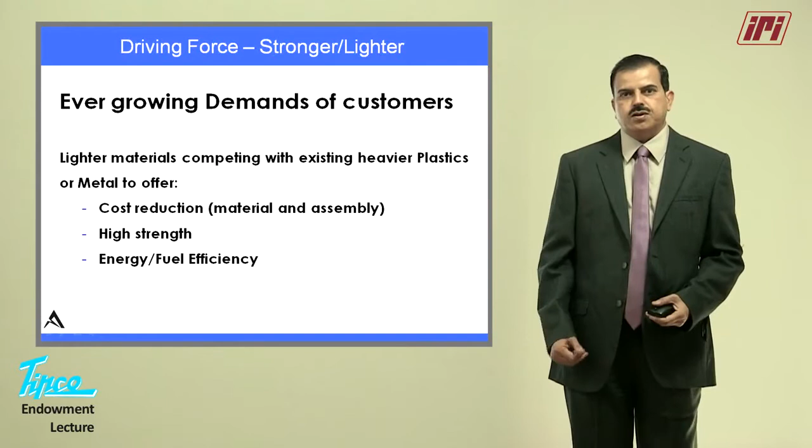This product we are marketing in the name of one of our group companies called Autotech Polymers. Basically high strength materials with the aim of reducing the weight of components. There is a continuous demand from customers that there should be lightweight which helps them in reducing the cost of materials. It can be achieved by higher strength because nobody wants to sacrifice any kind of properties, whether it is flexural or impact. And if it gives energy efficiency, that is a bonus. All these three things come true for a new technology material called long glass fiber.

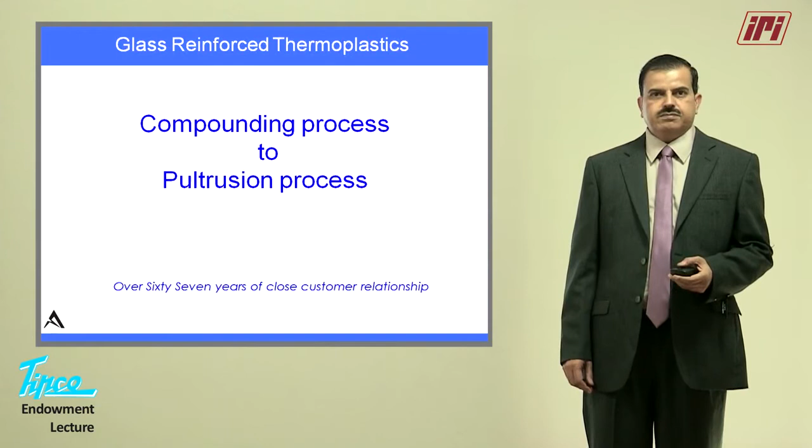Basically, while making long glass fiber, we have seen that we have moved from compounding process to pultrusion process. TIPCO had long experience of pultrusion due to another product which we developed in India, called jute phenolic. That first happened around 10 years back, to replace wood. That technology and experience helped us understand the pultrusion process being adopted abroad for making this kind of product. So long glass fiber for TIPCO is basically not a very new technology. We were using pultrusion process for quite some time.

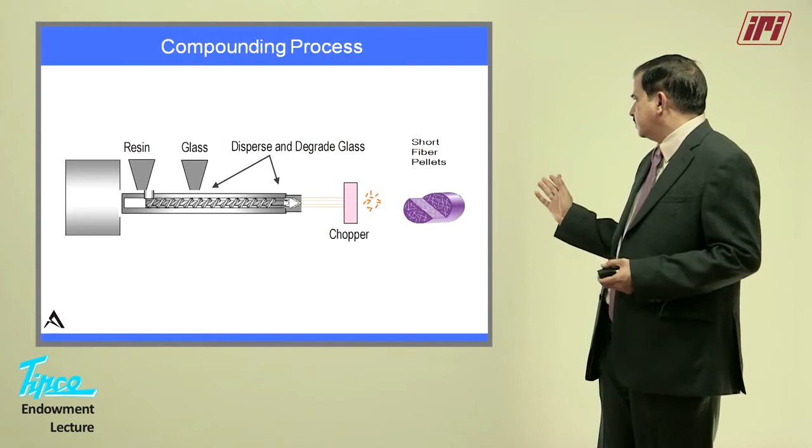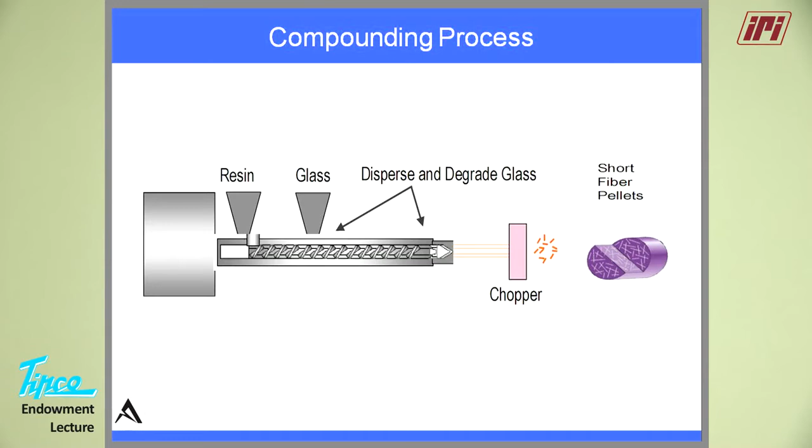I'll just explain to you what is the difference between compounding. The resin and glass are fed in the extruder, and then with the help of different kneaders it is compounded or mixed, and then taken into a water bath, cooled, and then cut. The last granule, in the case of short glass fibers, even in a 3 mm granule, you have so many broken glasses in the granule itself. Then of course it goes for the molding process, so further breakage happens, and that's why you get those properties. People have tried to maximize these properties, but there is a limitation in this process, it doesn't go beyond 0.6 to 1.1 mm in the product.

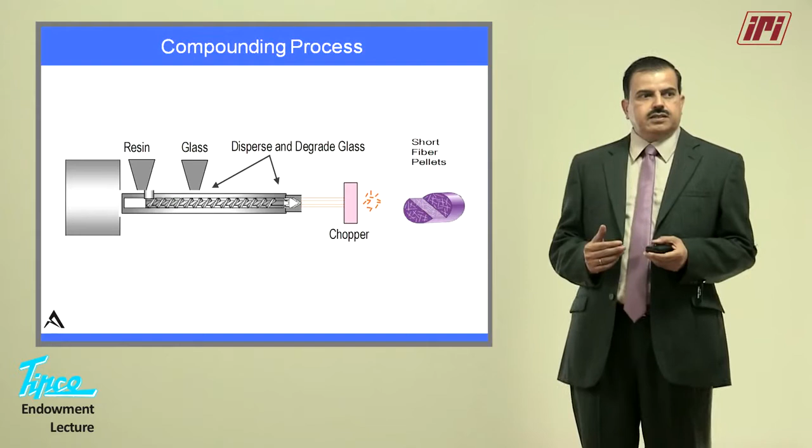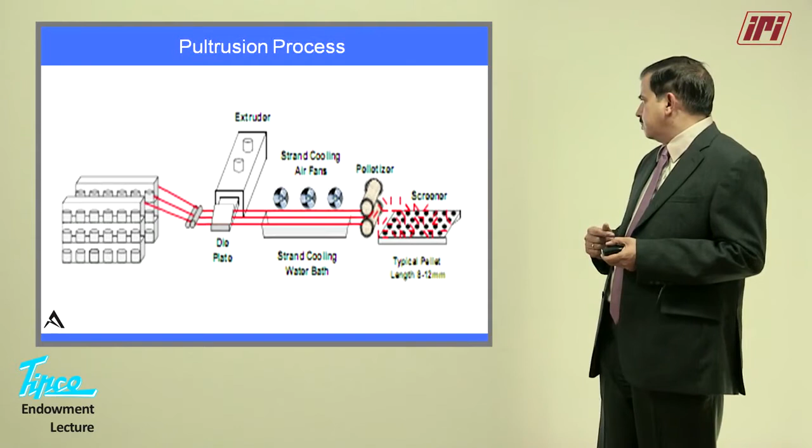So the alternative process was thought of, probably around 1995 or so in the US, and another product called long glass fiber took birth at that time. This is called the pultrusion process, where instead of glass chopped strands, we use rovings as a bobbin. It comes, passes through a die which is fed, resin is fed across, and in the die it is ensured that total impregnation, or 100% wetting of each fiber with PP or PA, whatever resin you are using, takes place. Then the process is similar, taken into a water bath and cut into a desired size.

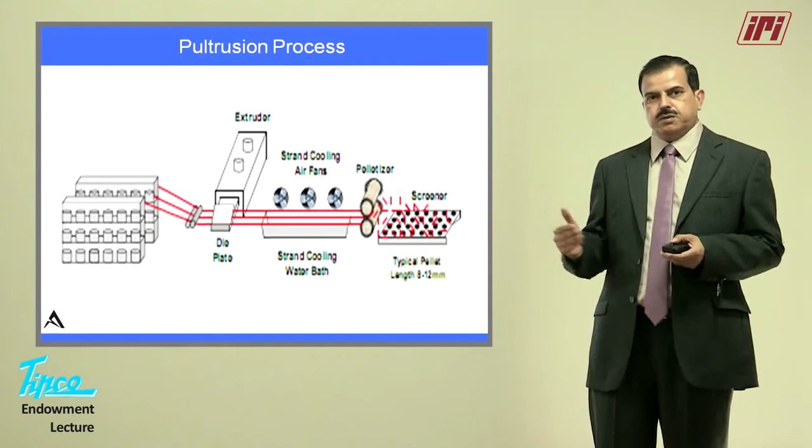When I say the desired size, it is 11 mm plus minus 2 mm. That is the size which has been found most suitable for being usable in the available machineries. When I say machinery, I mean further processes of injection molding, the tools which are being used these days. So the most suitable length for long fiber is 11 mm.

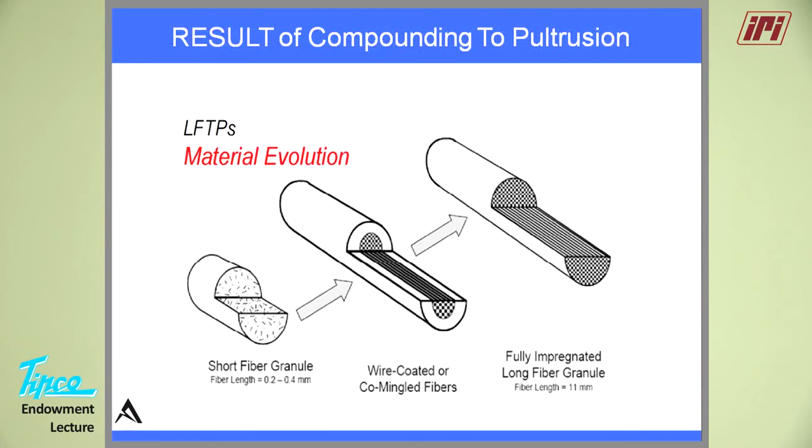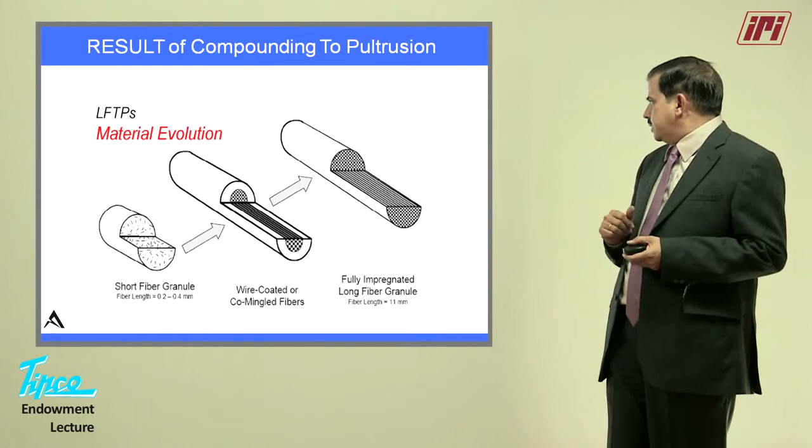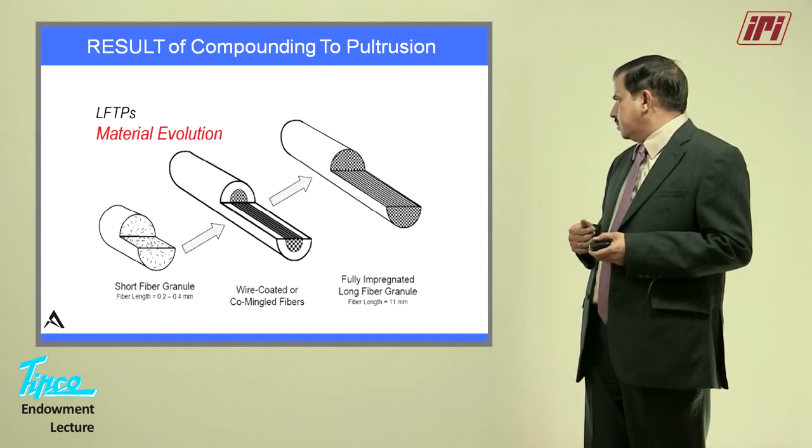The result of moving from compounding to pultrusion, you can see that there is one more step in between which happened. At present I am talking about going from small short fiber granule to a long fiber granule of 11 mm, but in between there was a time when the long fibers were being made by a process called wire coated technology. That wire coating technology gives you a coating of resins on the fibers, and the result is this: if you cut open the granules, you see dry fibers.

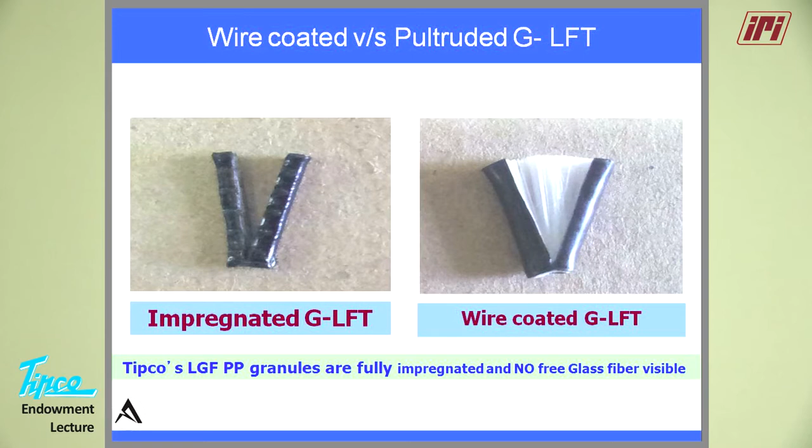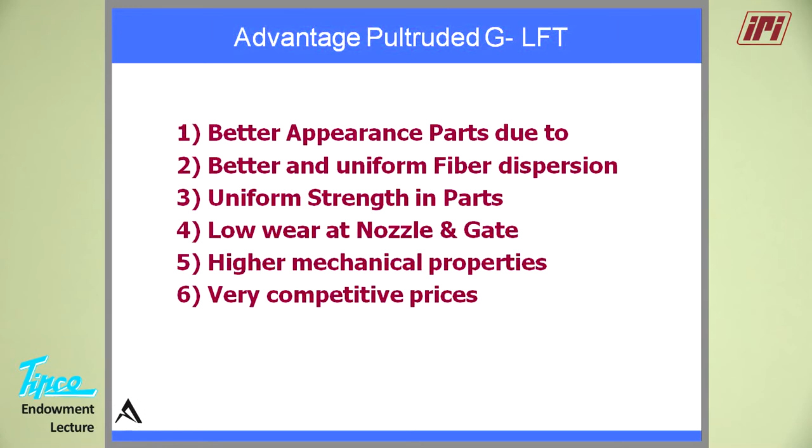Whereas in the latest technology, pultrusion technology, there is no dry fiber seen. The advantage of this is that it gives much better appearance, and I feel the biggest advantage it has given is that it is processable, or process friendly with the existing machines and existing tools. You don't need to make many changes in the process machineries, which is a cost.

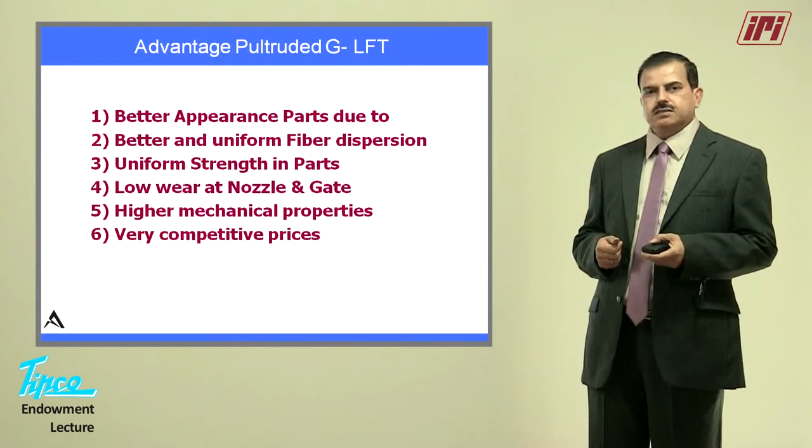When the wire coated technology was there, there was a need of making a special machine for using long fiber, and special tools to handle long fiber, so that you can exploit the length of the fibers in the final component.

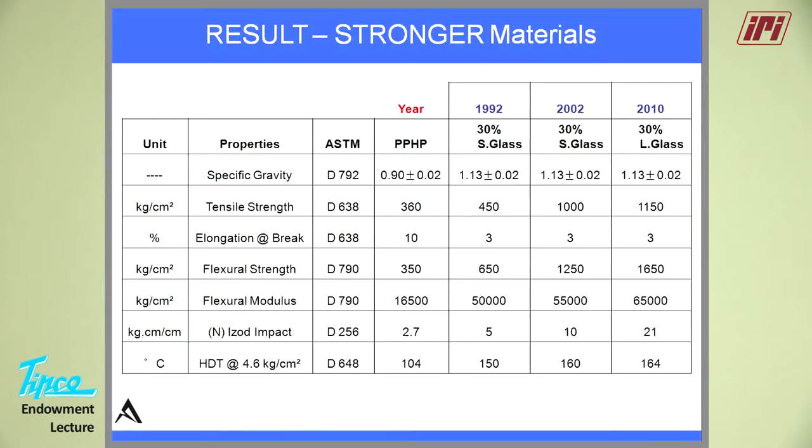This is the history of the properties. Especially keep your eyes on impact strength. I will say that in 1992, glass fiber PP 30% was having 5 impact. In 2002 it was improved to 10, and in 2010 it has become 21. So a long way, approximately 4 times the impact strength you get in today's long glass fiber PP compounds versus 20 years back short glass fiber PP compound with the same loading of glass.

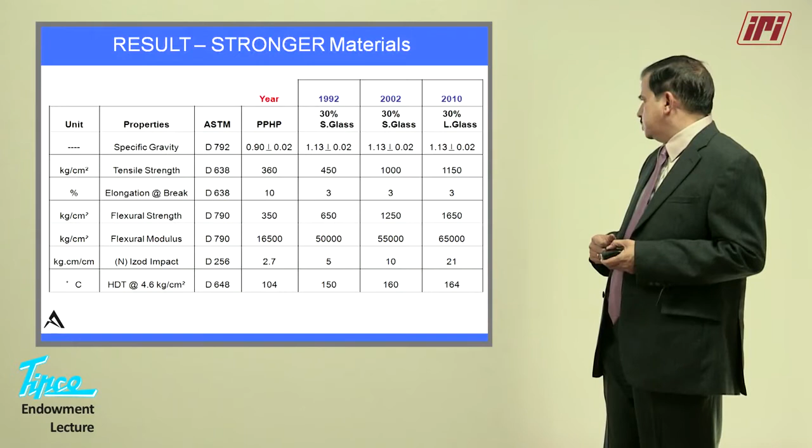As you can see, tensile also has improved almost 2.5 times, and flexural also has improved by almost 30%. So these are the advantages: you have achieved the impact strength much higher, tensile strength has improved, and flexural has also improved a little bit.

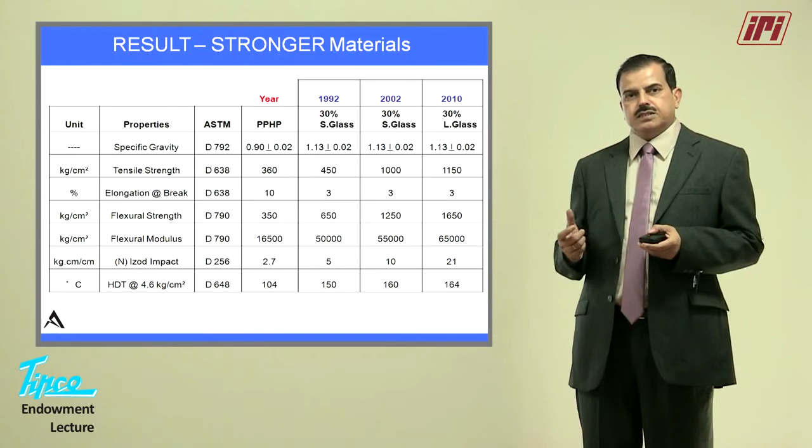The biggest advantage of this you will see in the next slides, that this helps design engineers to make thinner parts. This makes design engineers select commodity plastic compound pultruded with glass, that is long glass fibers, in place of highly costing materials like 30% nylon 6 or nylon 66.

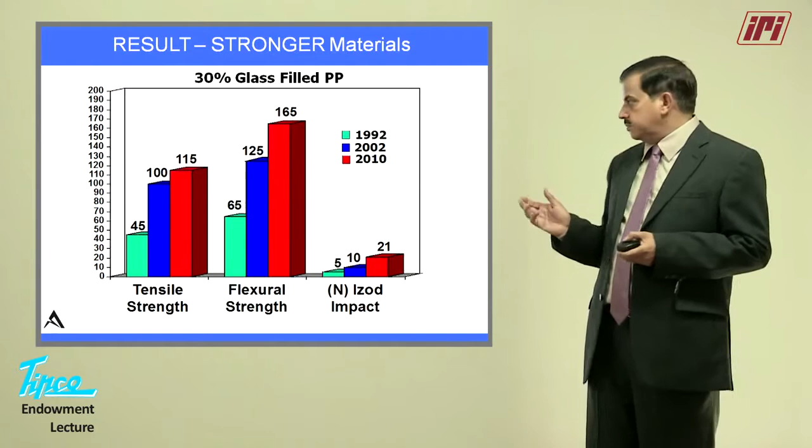This is a graphical presentation of three important properties which have improved over these 20 years. I would like to spend some time on this slide. This is one of the best ways to find out whether your component is made up of long glass fiber or short glass fiber. This also gives an idea why the impact strength has become so high while using long glass fiber.

Basically, if you make a component with short glass fiber and the same with long glass fiber, take out both components from the mold and put these two components in a furnace at around 650 degrees centigrade, you will see a big difference. A short glass fiber filled PP compound or PA compound, the polymer will burn off at 650 degrees centigrade in half an hour if you keep it, and all the glass fibers you will find flat on the surface.

Whereas in long glass fiber, what happens? You can see that whatever shape you have kept in the furnace, that shape is retained even after all the polymer has gone, all the binding strength of the polymer has gone, but still you can see a structure, you can see the holes, you can see exactly how it would have been, although because the resin has gone, the fiber gets slightly expanded, so the holes become smaller than they actually were.

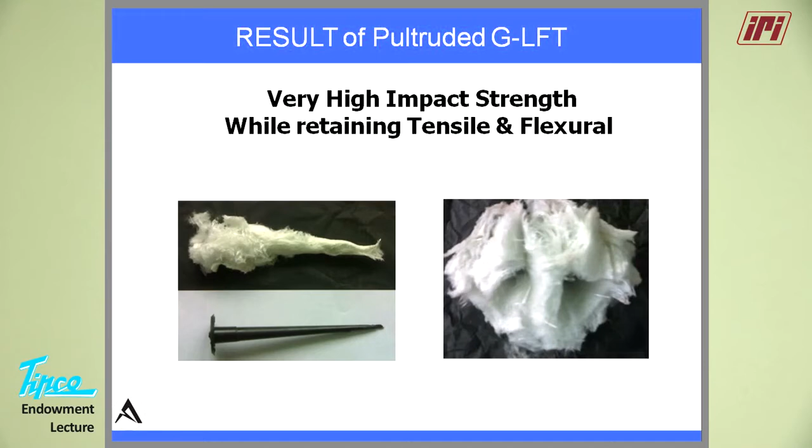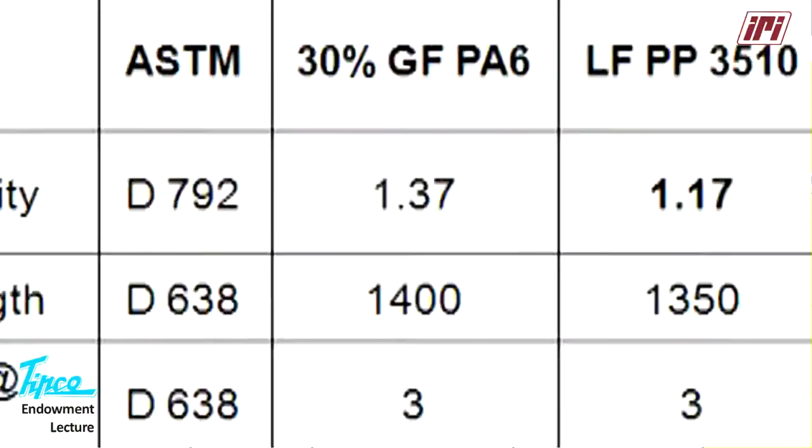By doing this, you are using a very efficient process of injection molding, and you are trying to reach towards the properties of FRP. You can see some comparisons I have shown here, that a 30% glass filled nylon 6 can be replaced with 35% long glass fiber PP compound, and this gives enormous benefits of approximately 17% reduction in the weight of the part, almost double the impact strength of 30% glass filled nylon 6, and very similar properties of flexural strength, so you don't have to change the thicknesses.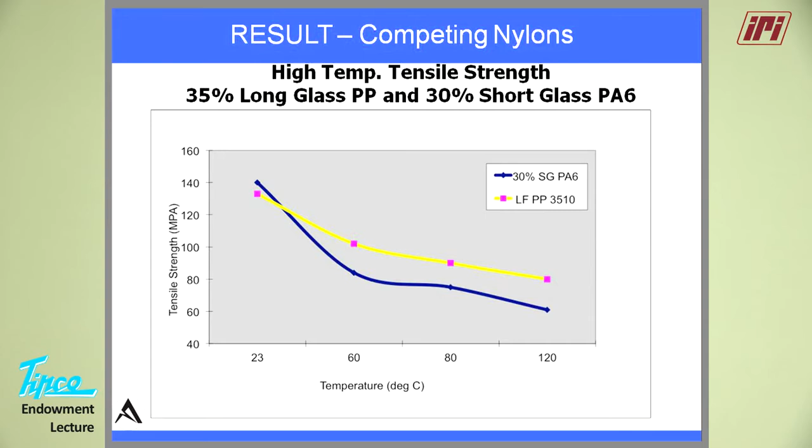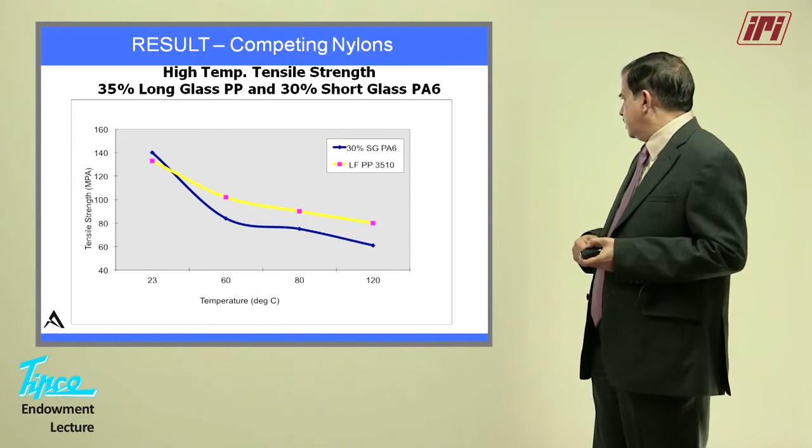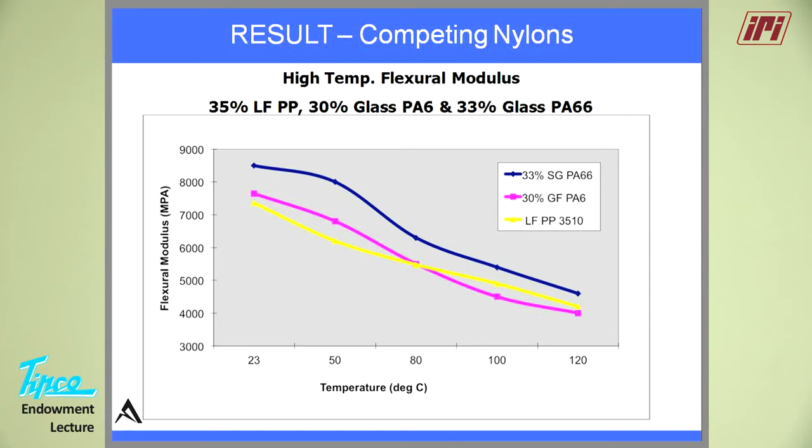But as you can see, the yellow line, up to 120 degrees centigrade, the drop of tensile property of long glass fiber is lesser as compared to 30% nylon 6. So if you test the tensile strength at 120 degrees centigrade, long glass fiber PP gives a better property than nylon 6 30% glass filled. Similar is the story with the flexural properties. It lies somewhere in between nylon 6 and nylon 66 up to 120 degrees centigrade. So in most of the underhood applications, 35% long fiber PP can be used as a replacement to nylons.

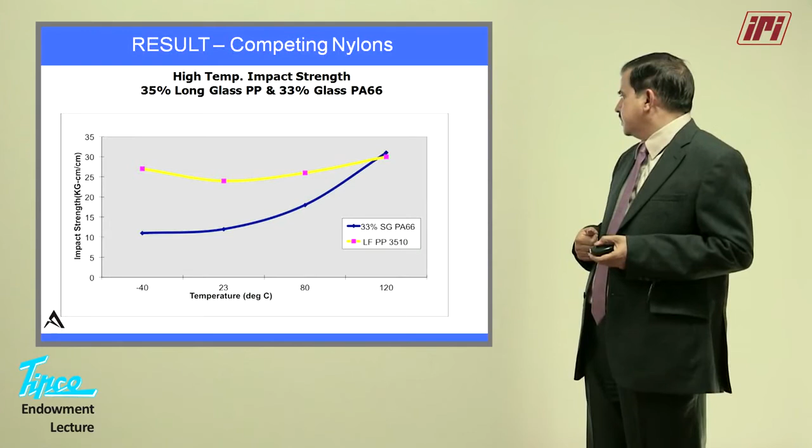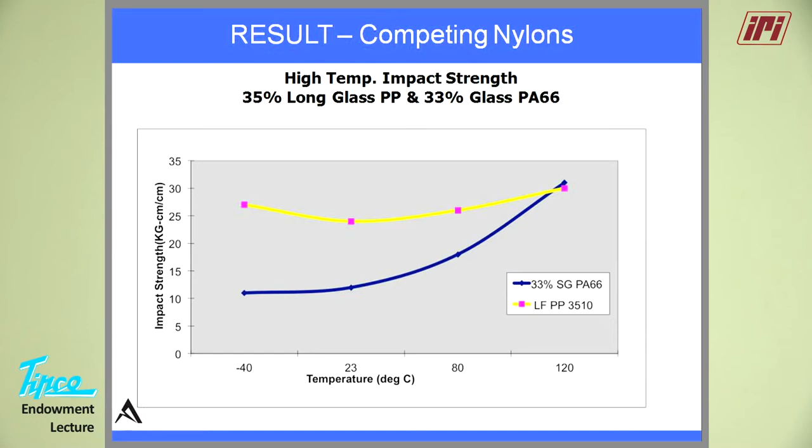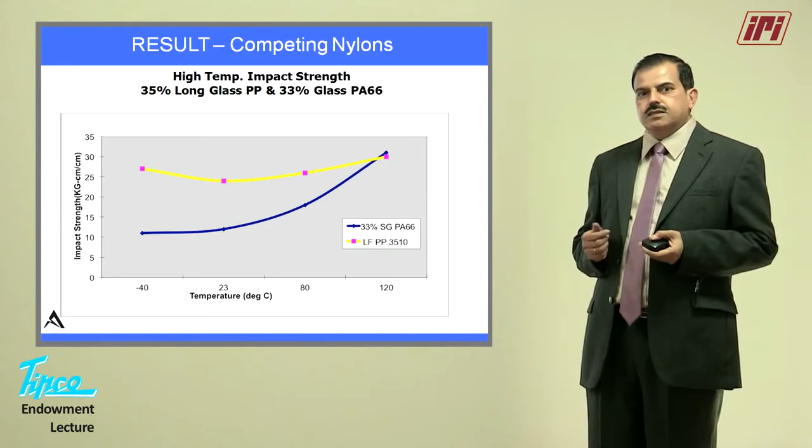This is a very surprising and good thing about long glass fiber, that impact strength, as I told you, is quite high because of the structure it retains even after burning the polymer. That is the reason why at sub-zero temperatures, the impact strength further improves. It doesn't go down. So that is something very unusual with plastics, because at minus temperatures, generally plastics tend to become more brittle. This is opposite.

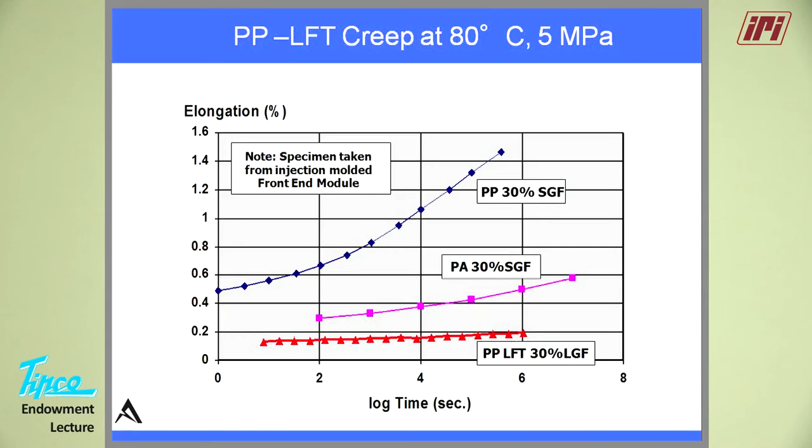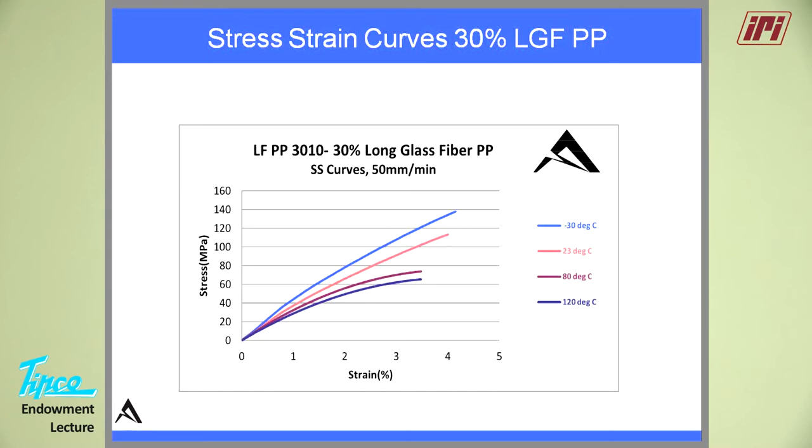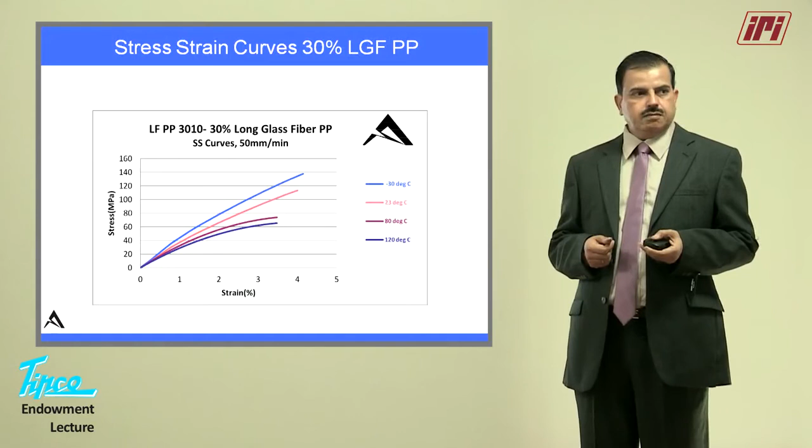There are some more advantages of long fiber. That is, the creep value is the minimum as compared to short glass nylons. That's the biggest advantage. All the properties for long glass fibers are available with TIPCO Industries. It is also available in Moldflow software, and those properties can be used by the design engineers while selecting our material.

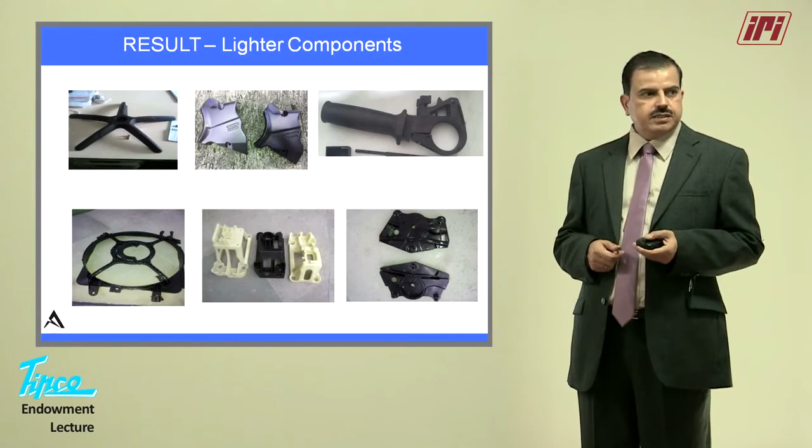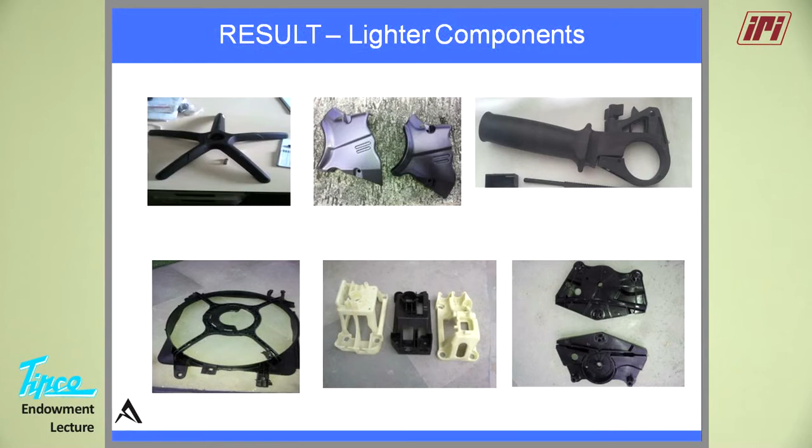These are some of the examples where we have worked in India, and in many places it has been successfully commercially implemented. Some of the applications you can see, like chair base, which used to be in nylon 6 30% glass filled, the chain cover for two-wheelers, the tool holder for power tools. The next one is the shroud. Next is the gear shifter base, and there are some control modules. This particular one is the window module for one of the OEMs in India.

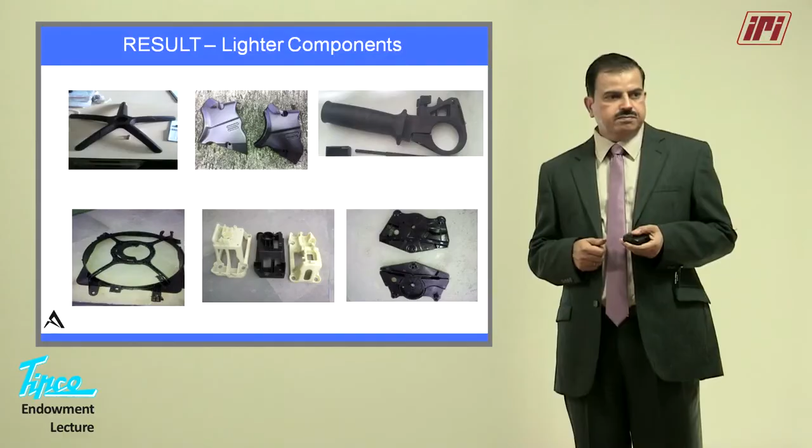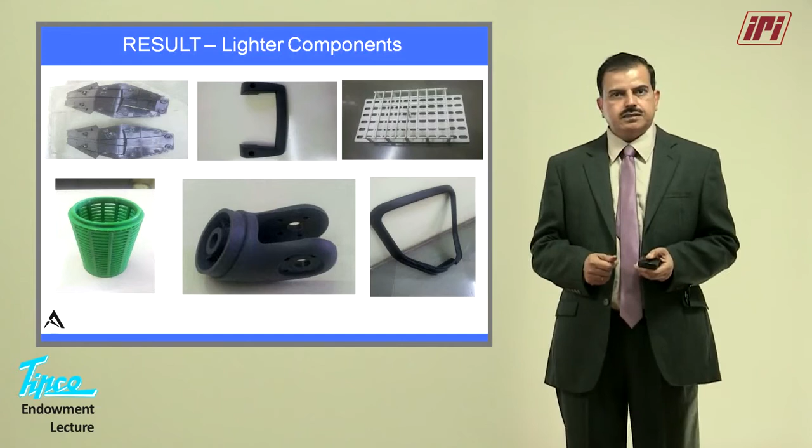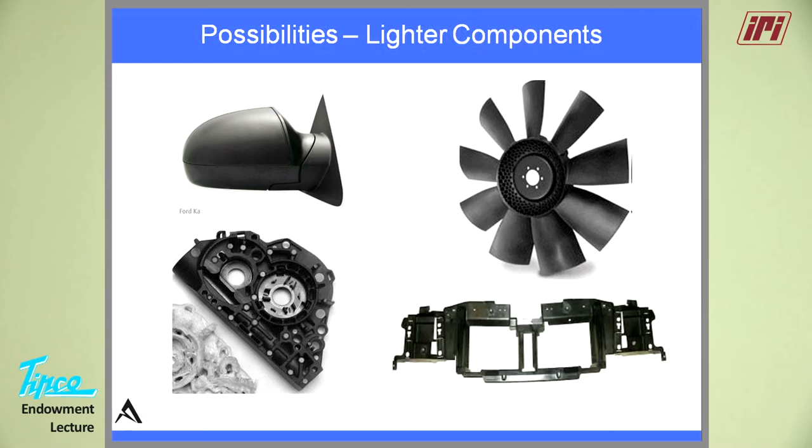Next, you can see some of the other automotive and non-automotive applications where nylons or PC ABS or ABS parts were replaced by different percentage loaded PP long glass fibers. These are some of the possibilities which we see in India, that some big components in the automotive industry which are presently in nylons will get replaced by long glass fiber. The component down in the corner is called the front end module, which in one particular model in India has already come in plastics, and soon there will be many OEMs looking for this kind of opportunity of weight reduction.

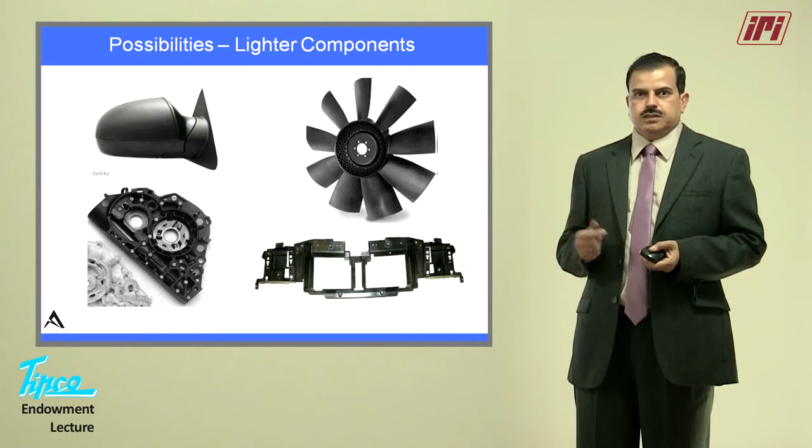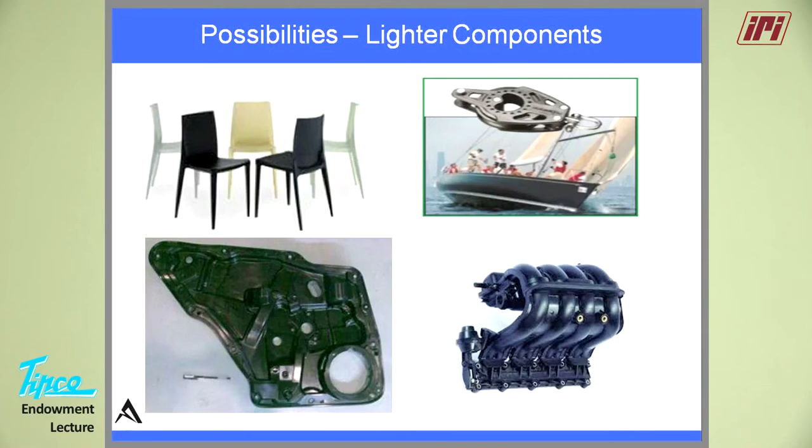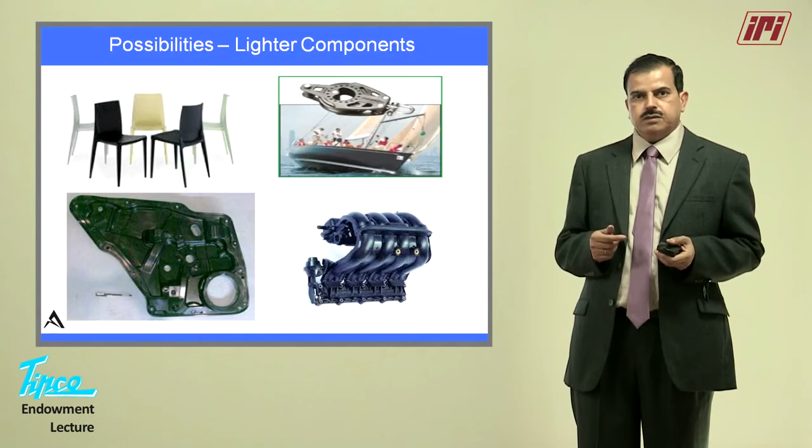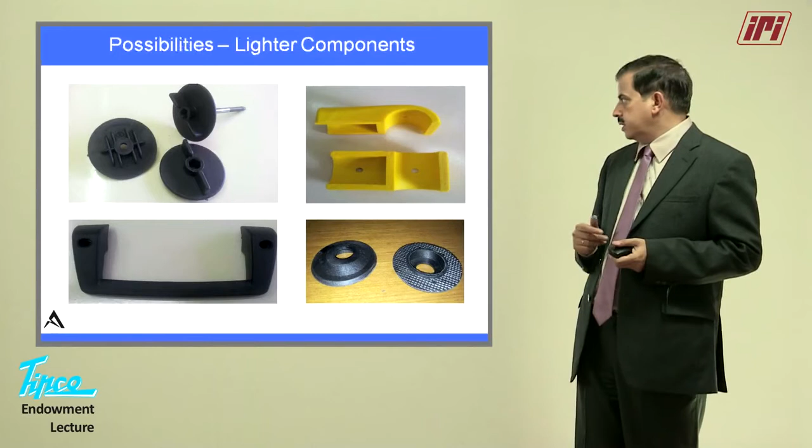We are seeing a lot of interest from the OEM side to convert their steel parts into long glass fiber PP molded parts. Some of the possibilities in India are very trendy chairs which are gas injection molded, mainly for restaurants and places like airports or malls. We also think that air intake manifolds and door modules are going to be quite popular in the automotive industry in times to come. These are some small parts for automotive and non-automotive applications where the nylons can be replaced by long glass fiber PP.

As you can see, the future of long glass fiber seems to be quite bright, because whatever specifications and requirements had been converted to glass-filled nylon 6 around 20-25 years back in place of aluminum. So aluminum parts were replaced by nylons, and now because the PP is in long fiber, PP is competing in the properties with nylon 6 short fibers.

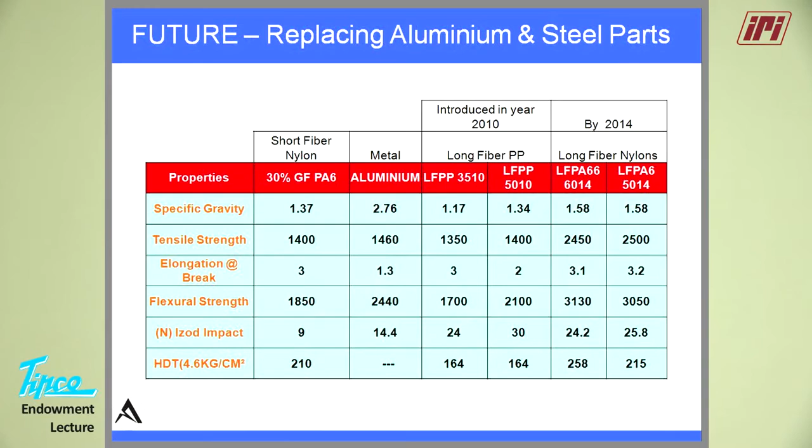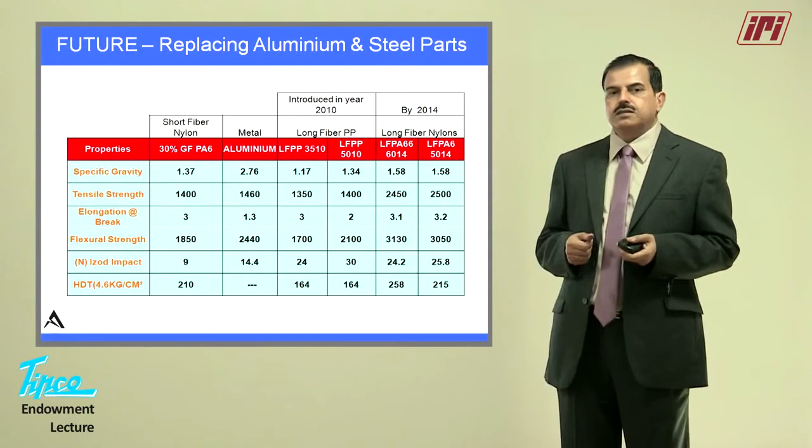So most of these parts we feel will be converted for two advantages mainly. One is the weight will be reduced by almost 15 to 20%, and there will be cost saving, not only in the raw material cost, but in processing also energy and fuel will be saved, because PP can be processed at much lower temperature as compared to nylons.

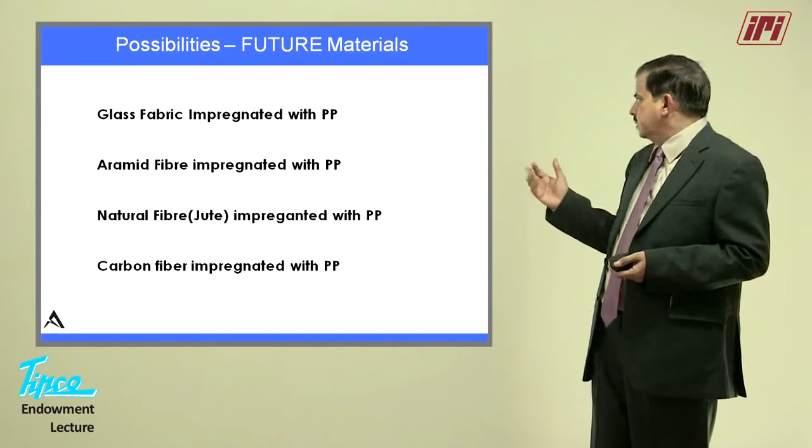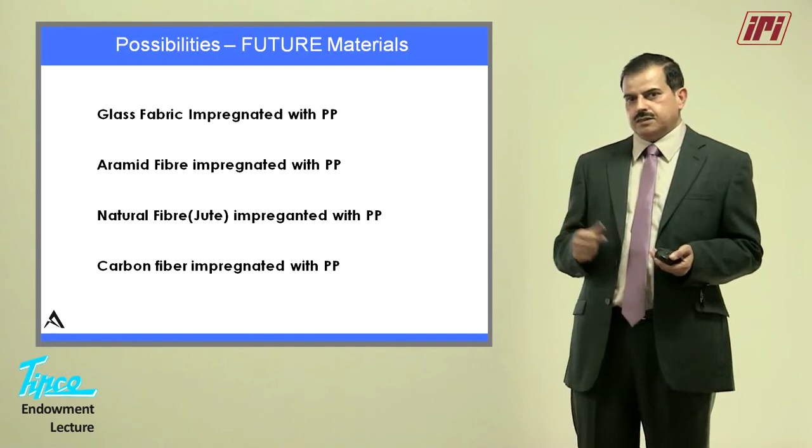I feel the customer is not going to stop at long glass fiber, and he cannot remain satisfied with long glass fiber properties alone. Already the demands have started coming to increase the strengths further, while the weight should not go up. So I feel the changes in future are going to be in the form of fibers which are being used, probably the fiber itself from glass to aramid, or some natural fiber like jute, or finally, as everybody knows, carbon fiber, which is the very high strength fiber available today. So this is going to be the path which will be followed by Indian industry also.

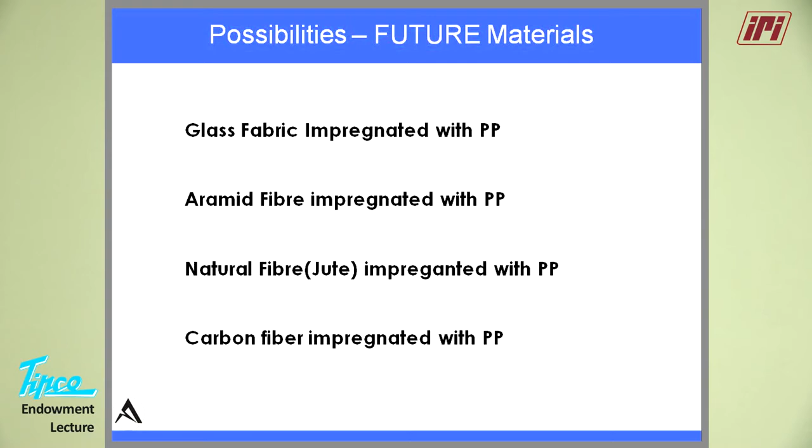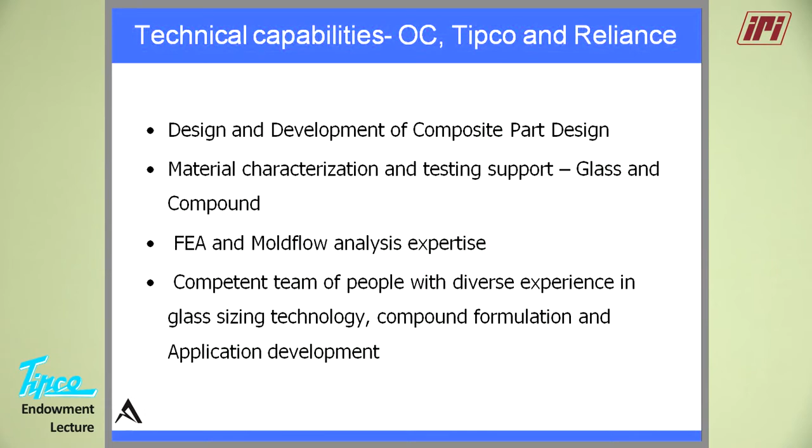Now I will let you know the team which has worked behind this particular project, and now that whole team has a capability of design and development. Our products are already in the Moldflow database, so most of the properties are available and can be used for doing various analysis by the design engineers of OEMs. Basically, Owens Corning as a glass roving supplier, and Reliance as the main base resin supplier, have worked very closely on this particular product with TIPCO for developing and promoting this product in India.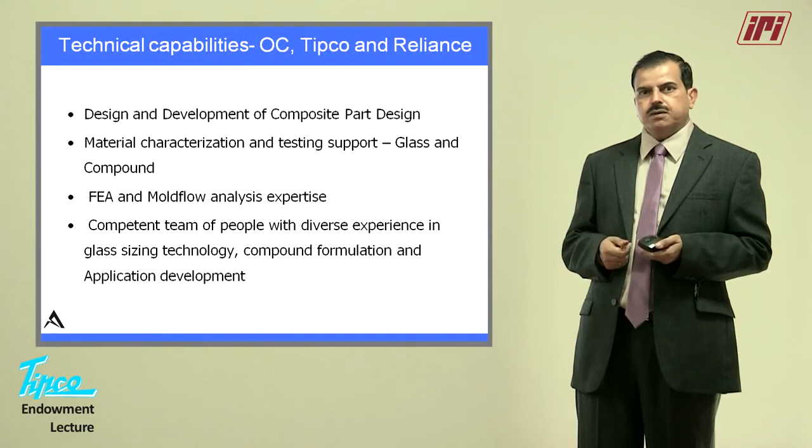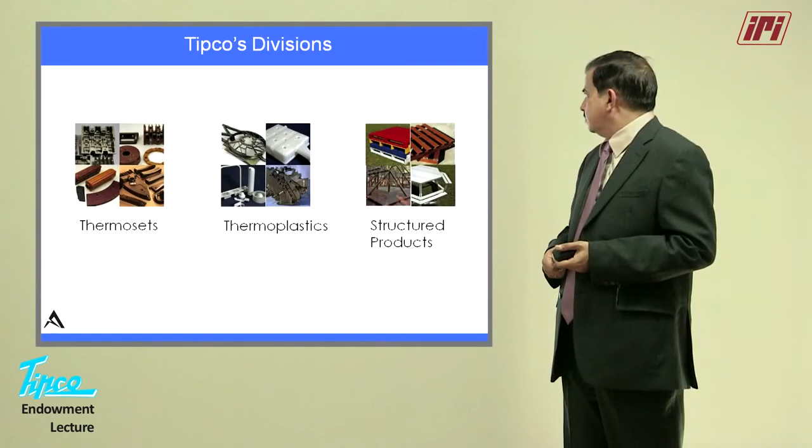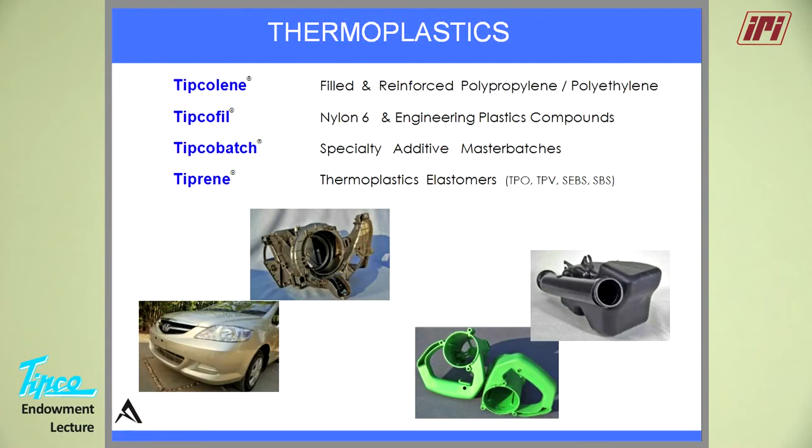I'll tell you about TIPCO, because of this company I am standing today. So some 2-3 slides about TIPCO. TIPCO has 3 divisions called thermosets, thermoplastics, and structural products. In thermoplastics, we do mainly PP compounds, mainly for automotive industries. And in thermosets, we do mainly phenolic resins. Recently we have also started doing some polyester resins. That is mainly for switchgear industries, electrical industries, and defense.

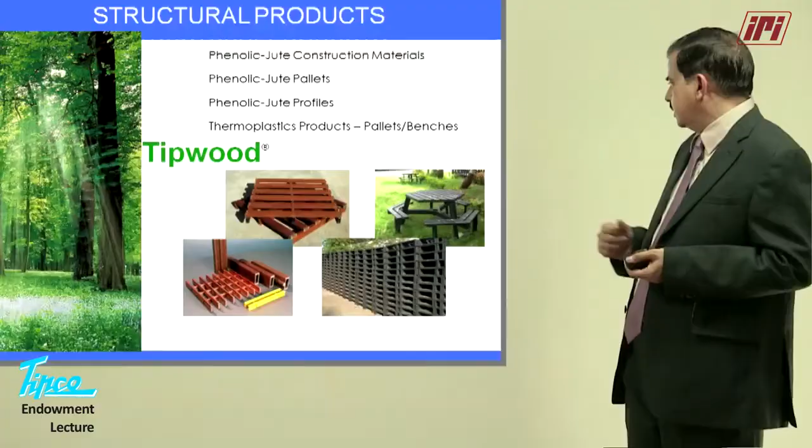The third category is structural products, which we sell in the name of Tipwood. So anything which replaces wood comes in that. As you can see, some pallets made out of the waste material coming out of our PP compounding plant get converted into lumber and finally into a pallet. Similarly, that brown color thing which you can see is the phenolic jute composites, which are becoming popular in the construction industries for various applications.

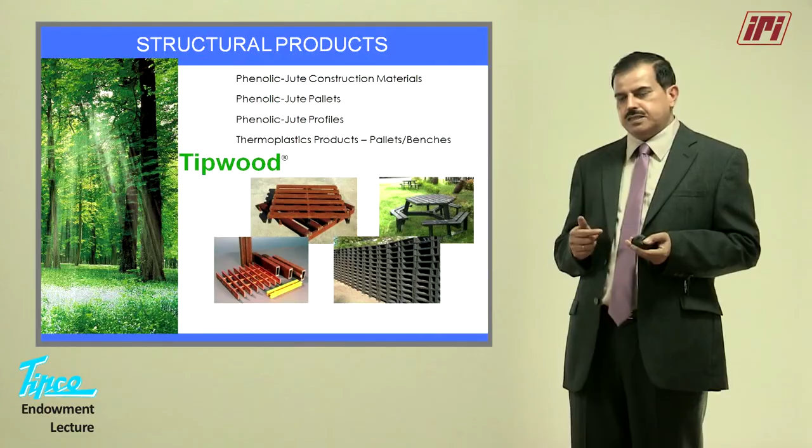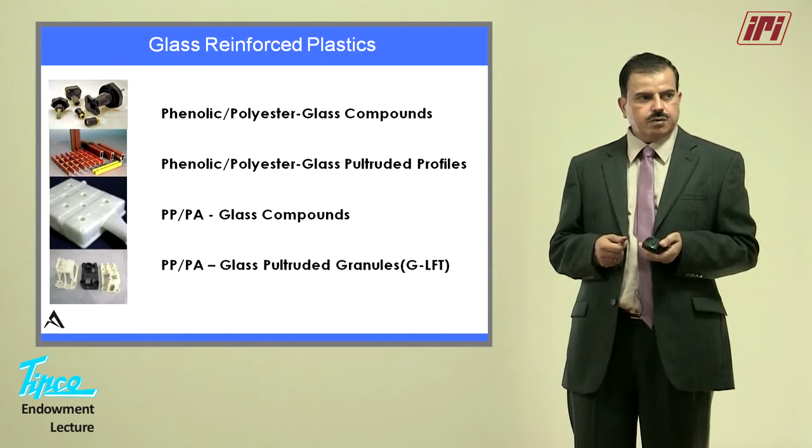So these are the three divisions where we are working with new materials, and I see a big future for all these types. And one thing you can see is, out of these 3 divisions, 2 divisions are using the pultrusion process. We are working on new products with glass reinforced plastics, phenolics and polyesters. Then, as I told you, long glass fiber PP I discussed in detail. The next material will be long glass fiber PA, that is nylons, for still higher property requirements, and the glass pultruded granules in PP and PA. That will be the next thing.

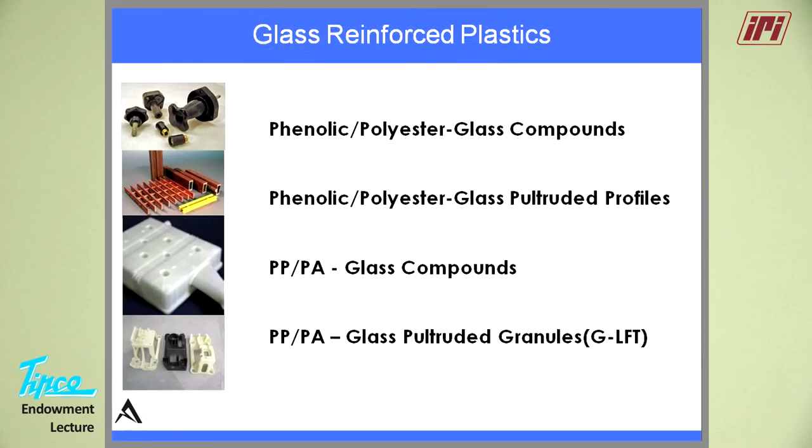With this, I would like to conclude. As you have seen, long glass fiber PP was launched around 3 years back, and now it is becoming popular in India. We are working on many other new products, mainly somewhere in between compounding and composites. So I personally feel that the demands from the customers will be increasing further to increase the properties of the materials, but also there will be demand for reduction of weight of the components.

So as a raw material supplier, we feel a responsibility. Earlier we always used to think about compounding. Now we are thinking about composites and pultrusion methods. There will be several other processes which compounding industries will have to adopt to meet these requirements of the final customer, that is cost saving and weight saving. With this I conclude my technical paper.